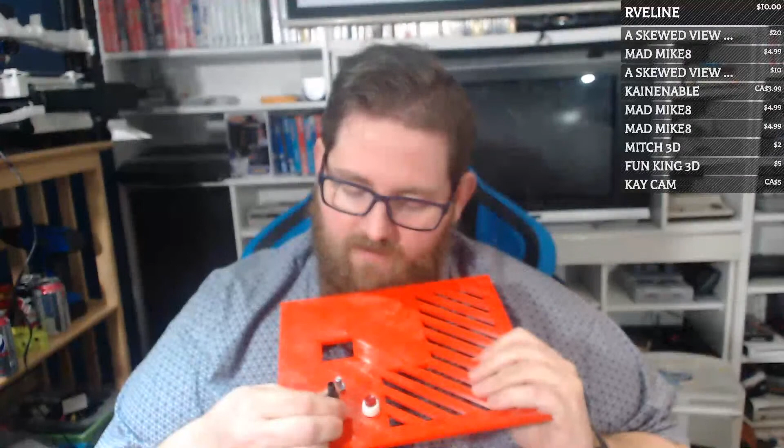Since then I've printed the door that we designed last week, and I verified that the pieces fit. They needed a little bit of filing to get them to cooperate, but you can see I got my power button, my power jack, and the volume knob was just fine.

That's the piece we test printed last week. So there's the test print. That was just sort of a cutout of the piece.

And I made a couple small adjustments since then, and so you can see the back. The fan shroud part here did turn out a little sloppy. It'll be fine because it's on the inside, but I think probably could use some supports underneath there.

So that'll take a 40mm fan. I ordered a bunch of fans though, and unfortunately I've got 1 or 2 40mm, but the rest are 30mm. So I'll probably release a version of this that takes a 30mm.

And this is designed to fit the Raspberry Pi, which I've got my dead version somewhere. I've got a Raspberry Pi that died on me, unfortunately. I've actually got 2 of them that died at this point. I don't know where I stuck it now.

I was thinking, oh, I'm not going to use that at all today. And there it is. So, yeah.

Pi mounts up like that. Should direct the fan right over top of the processor, which is there.

And there's a slot in the back, so you've got the micro SD card accessible even when it's together. So if you want to do a software update or whatever, no big deal. And there's enough room in this panel that we could add Ethernet and USB to the bottom.

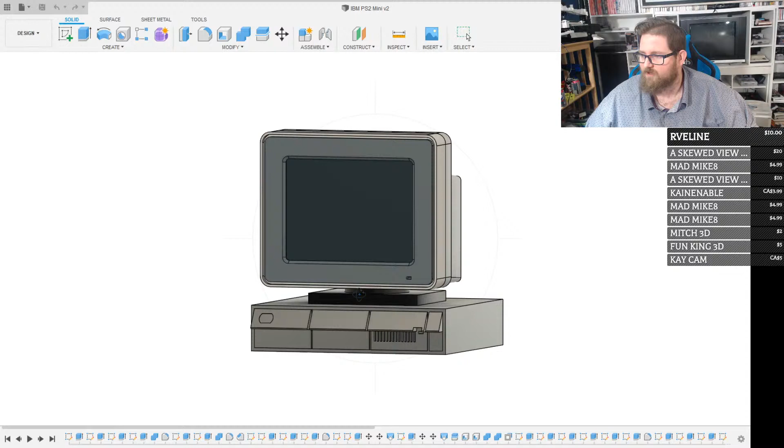So I've been working on this guy, which is a recreation of a 286 IBM PS2. The monitor's a little bit different because I didn't want to waste a ton of plastic.

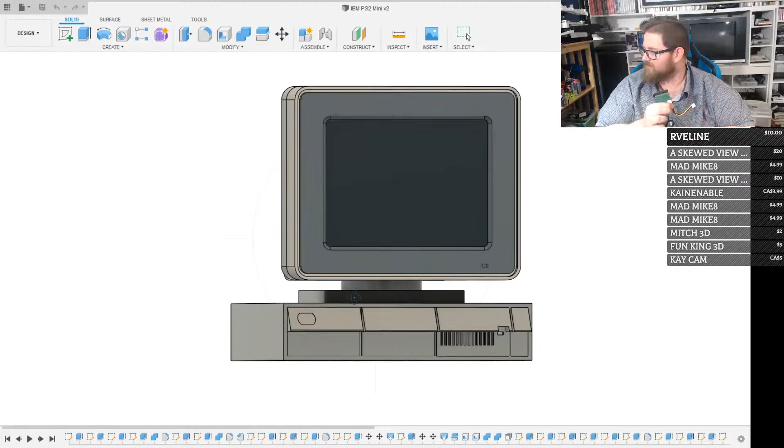So before I go into all the effort, because I am going to model in a functioning floppy drive bay into the front of this, right where it normally would be. Also, I'm going to try and model in a power switch the same way the original power switch is, and there's going to be an activity light for the hard drive, which actually just reads off the activity light on the Pi. So give me 2 seconds, I'm just going to go grab a floppy drive.

I'm hoping by next week, I'm going to spend next Wednesday getting things better organized here. So I've got an original, I don't know, this is a no-name brand floppy drive. But it's got pin 1 marked, so we should be able to just hopefully jam that in there. Put that together like that.

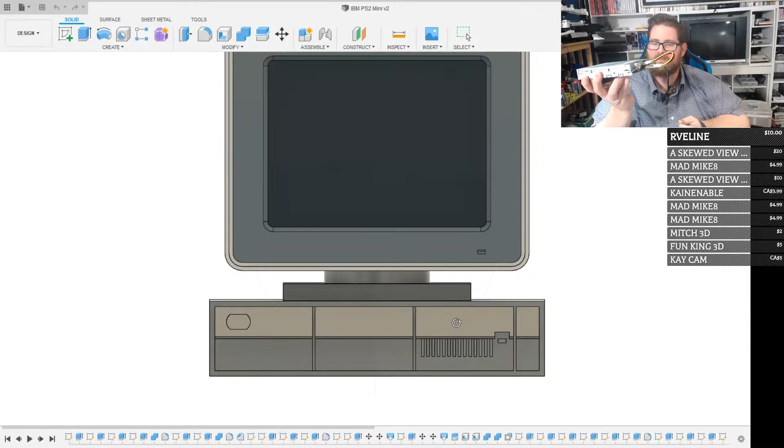Theoretically, that should be now accessible like any USB storage device.

It's a 3.5. I couldn't find... not that... So the original design of this only takes a 3.5 anyways. I have been looking for a way to adapt a 5.25 just because I have a few machines that run on 5.25s that I have floppies for, but I don't have boot disks for. So I was looking for something that would allow me to write 5 1/4 through USB, and so far all the USB devices I found are read-only. So unfortunately...

Okay, so what are we gonna test this on? I need something, I guess this is gonna be a little more complicated than I thought, because I need something I can actually interface with.

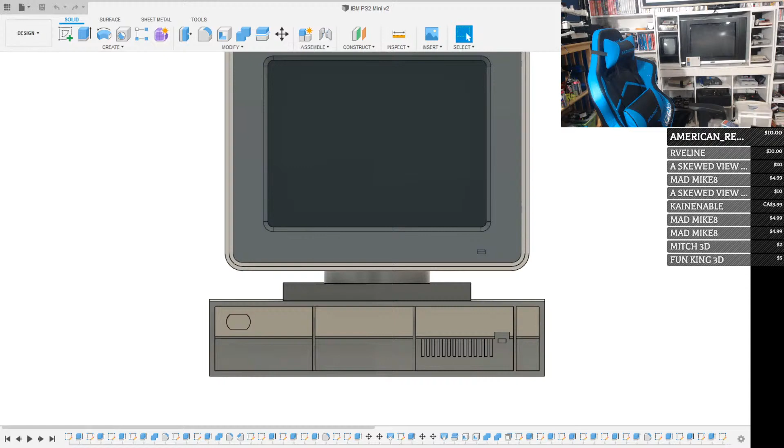Okay, let's see. For those who don't know, who don't follow him on... oh, first of all, thank you so much, I appreciate it. Those who know, Steve is the... do you go by Steve or Steven? I'm sure we've had this discussion before, but...

Steven was the first person to build a replica of my full-size arcade cabinet. And his, I would say, arguably turned out better than the original one.

It's a really long USB extension cable, but it's of questionable quality. But hey, let's see if I can get floppy access, or if the live stream suddenly dies because I just blew up my streaming computer. You know, have a good one.

Nothing happened. Oh, I mean it, yours certainly turned out more polished. You got the colors right. I didn't even hear a chime to say it detected something.

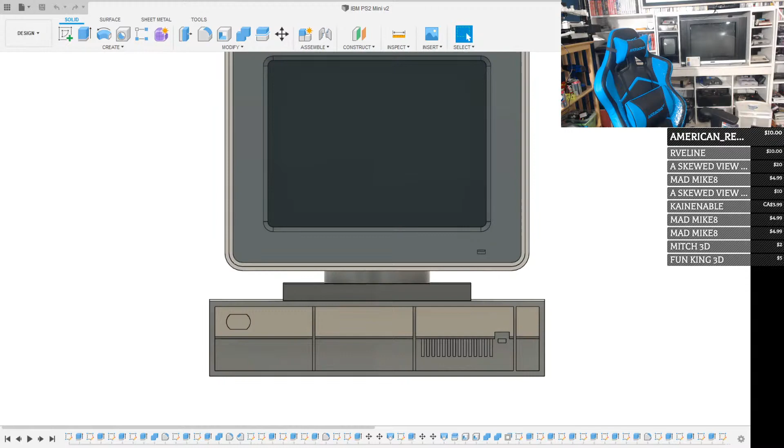Got a few floppies here. Yes, but who cares? What do we got here? How about an MS-DOS 6.22 floppy? Let's see if it'll read. I think if it doesn't read, it's probably the drive and not the disk. Oh, nope, fired right up.

Hello, Mr. Buttram. I will put USB on the back, most likely. Well, it read the disk.

So I guess the other question is, is it going to work on... now, I'm assuming if it works on Windows, it'll probably also work on Linux/Armbian/whatever. I have an Orange Pi running over there that I could try mounting it on and see what happens.

Bear with me for one more second while I go plug this into my other setup, and then we'll fire up a putty session. Okay.

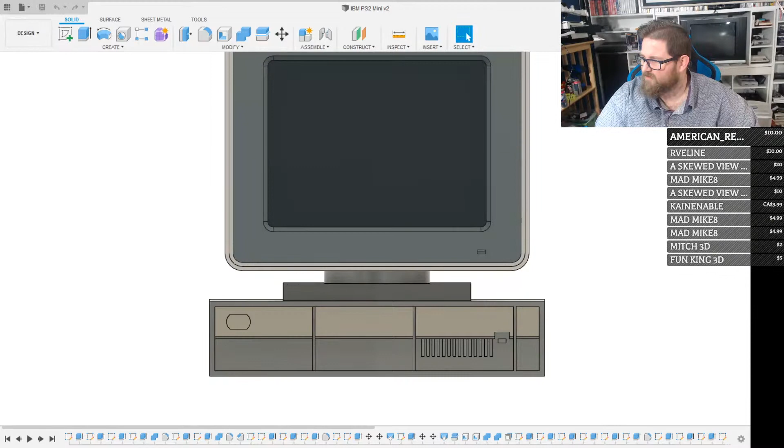Make sure the floppy kernel module is loaded. If this is not the case, edit the modules file and add the line for floppy. Okay. Create a folder to mount the floppy to. chgrp floppy slash media slash floppy. chmod 750 slash media slash floppy. Mount with read write.

Let's see. AutoFS. Let's do an apt-get AutoFS. Oh, apt.

Oh, I just realized it's not displaying putty. Sorry, guys. Putty. That must have been boring as hell.

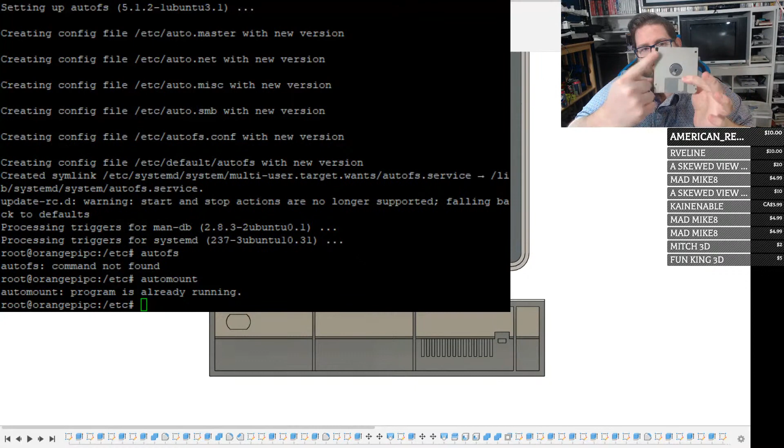Ha! That disk was read-only. Might have been fighting with this for nothing. So, for those who don't know, in case this is before anybody's time, there's a switch on old school floppies that allows you to make it read-only so you don't accidentally overwrite your crucial data. And being that that's an MS-DOS disk,

it automatically did that. So let's go ahead and try mount slash dev. Actually, if I go back through my commands, it should still be here. Was it DF? Doesn't show my floppy in here, unfortunately.

Okay, well, now we're getting somewhere. So the drive is HD, and so is the disk, but I've got HD, high density, and double density disks. umount slash media slash floppy.

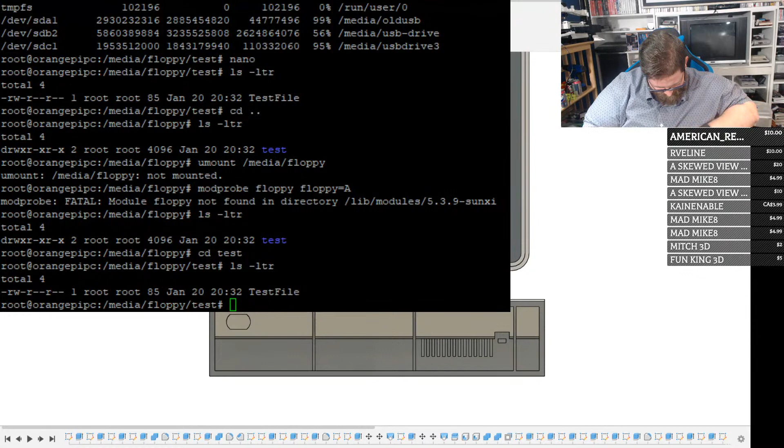She's really hugging on there. Like, so I ordered this, and it actually came with the wires hot glued into place as strain relief. So, I can see one of the soldering points doesn't look fantastic. I don't know if it'll show up on camera, but one of the soldering points almost looks like a cold solder point. Regardless, it worked.

Yes, that's part of the reason I'm doing it, so we get the sound effects. Okay, so I need my calipers, which I thought were right here. They're there. Okay, so we need to take some measurements off this guy. I'm going to go ahead and close the PuTTY session for now. Gets us back to Fusion.

I think if you're talking about on YouTube, I think LGR already did that.

So this thing's 100.7 millimeters across. Just gonna open up a notepad window. So floppy drive: 100.7 millimeters wide, and 24.5 millimeters tall. We'll have to add some tolerance around that.

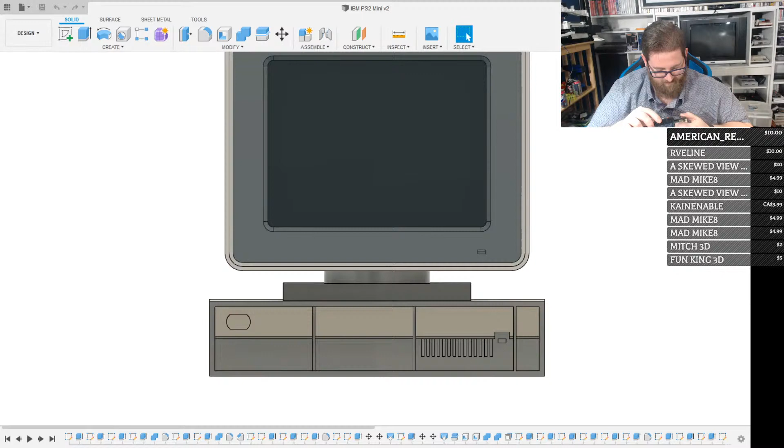So the real thing is going to be trying to figure out where the screw holes are. I guess you guys can't really see what I'm doing. I do have another camera I'm going to set up that points towards me, that'll give a better view of stuff. I just have not had a chance.

So it looks like the top of that screw is 5.7, and that's a 3 millimeter, so we'll probably give it a little extra space for it. And then from the front of the drive, we're looking at 26.3.

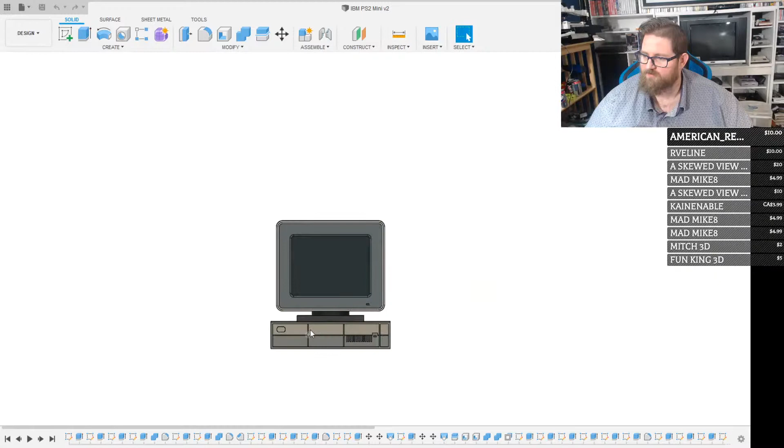Okay, so we got some basic measurements. So what we can do is we can jump into Fusion 360. Oh, and the actual floppy drive entrance, 90.7.

Wait, is it 90.7 or did I mess this up? Hold on. No, 90.7. And then 6.5 millimeters down... 4.3 tall. Wow. 4.3 tall and 6.3 down.

Okay, so I think the first thing I'm going to do is model the actual floppy drive, if I can. And the floppy drive in question is... 144 millimeters by, I think I got that recorded already.

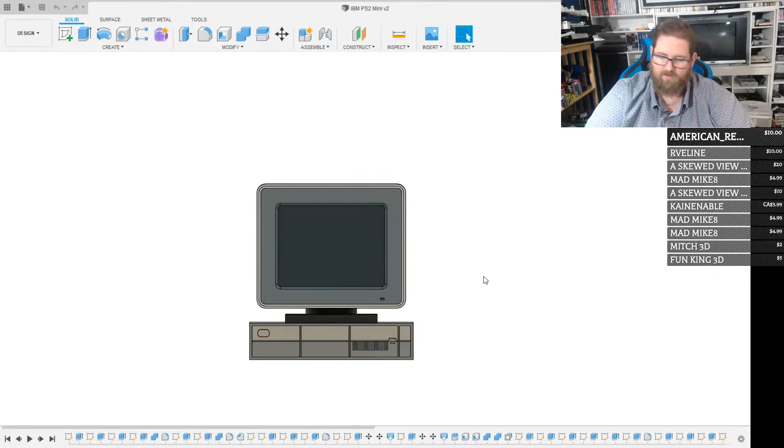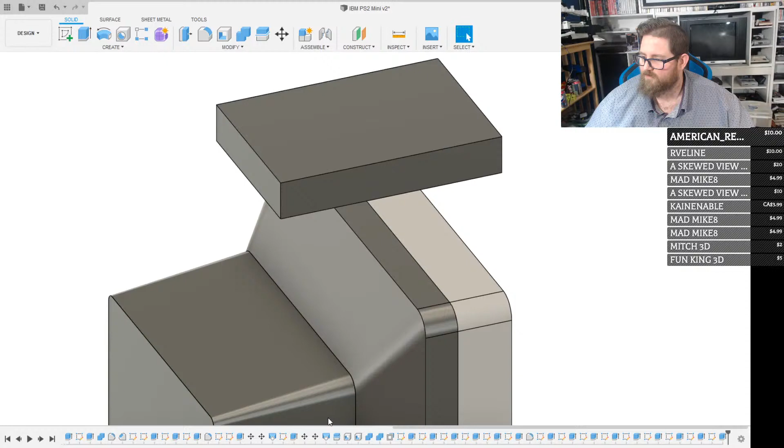Okay, so let's start off by just doing a rectangle here. We'll go ahead and create it on this face so it's the right way. We're looking at 100.7 by 24.5. Make it 144 millimeters long. Okay, so then go ahead and put the hole in the front of it.

So it's 6.3 down. I'm going to go ahead and start from the middle, so we'll do divide by 2. How tall was it? 6.3 down, 4.3 tall. So let's do 6.3 plus 4.3, divided by 2. And from there, we can create a rectangle that accounts for the hole our floppy goes into.

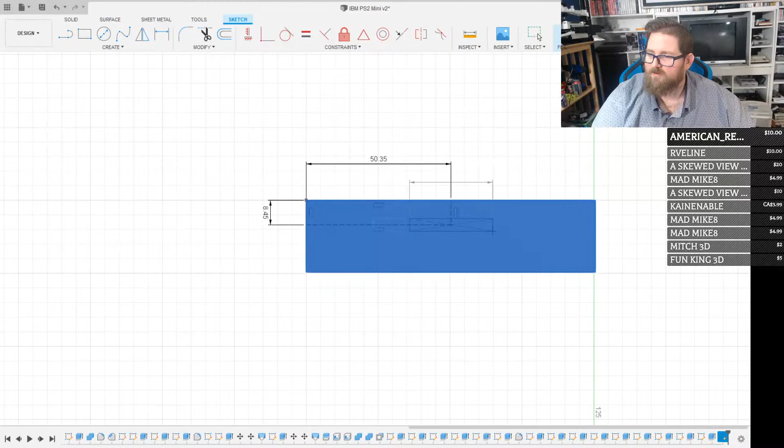So I'm going to start off with a center point one, and it is 4.3 tall and 90.7 wide. And let's just make it minus, I don't know, 90. So far, so good.

Then we need to add a button. Top of the button is 8 millimeters, so let's go ahead and add a line across the bottom here that is 8 millimeters tall. Then from the inside, we're looking at 14.8.

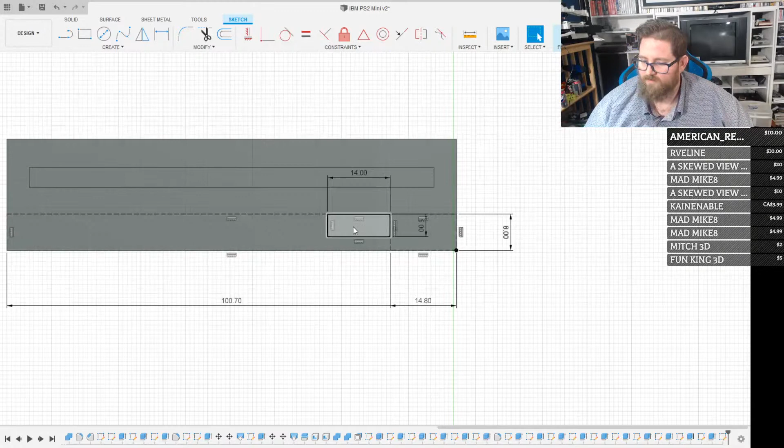And then, what were we? The button is 14 by 5, 5 and 14. And when extended, call it 6.5. 6.5. That looks about right so far.

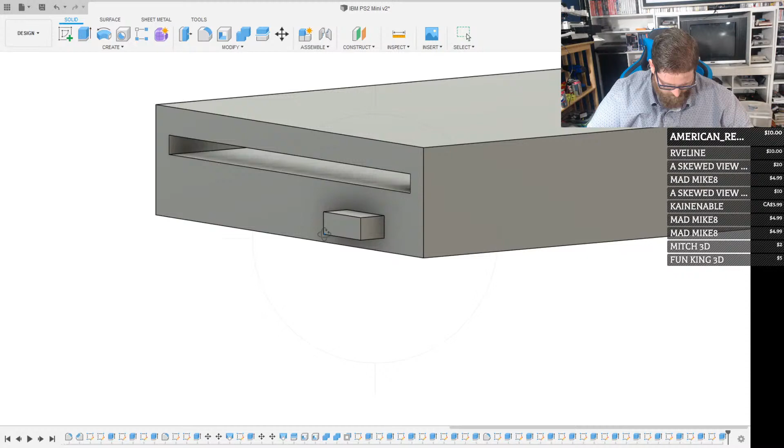Next, we're going to add in the optical, the light, that is. Okay, so the light is 4.4 from the bottom. Confirm I got that right. Close enough. It's 20.4 from the side.

And then the light is 5 by 2.5. Sorry, I gotta make sure I get this right. Yeah, that's right.

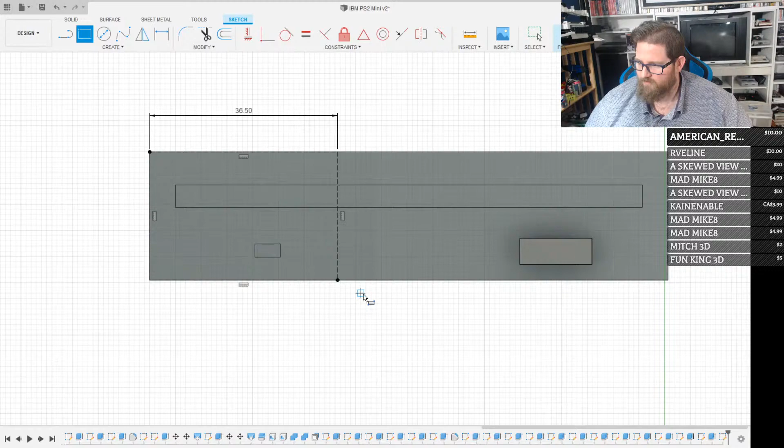We'll do 36.5 again this way. It's just quiet, that's okay. Okay, then cross this way.

That's completely fair. I just wanted to make sure I wasn't missing anything. And 3.

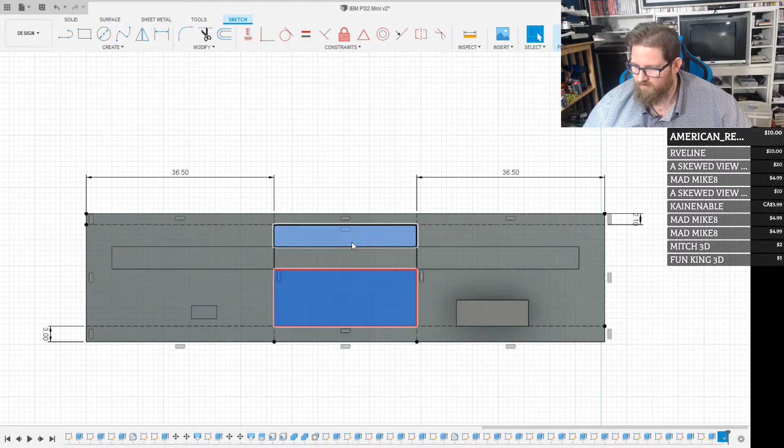Can I add—if I leave that like that, I don't know if I can add a chamfer without... no. Let's go ahead and minus 0.5. And then we'll bring that sketch back so I can do a minus 0.5. And then we'll add a chamfer.

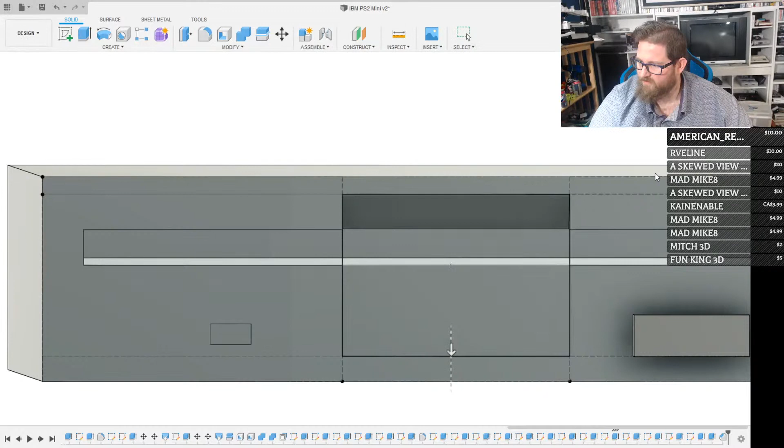Distances, and we're gonna go 4 and 8, 9, 12, no, 10, 11, 10.5, 10.8, 10.9.

What do you think? Does that look like a floppy drive?

I do collect PC parts. That's the other thing I collect, which I don't have enough space for, either for 3D printing or that, but I do it anyways.

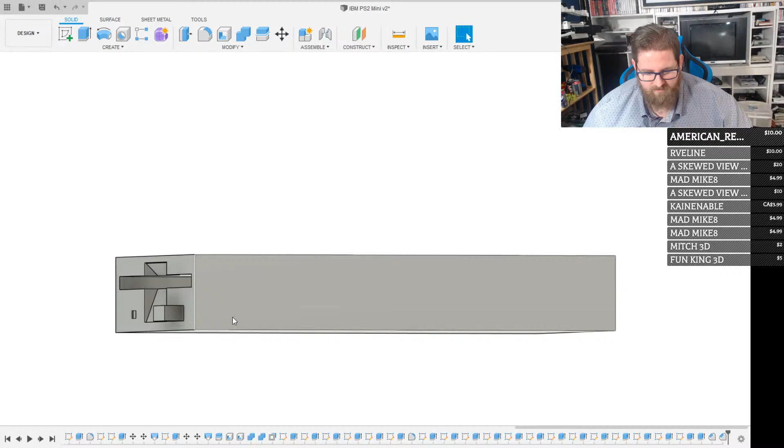Okay, so now we need to add the screw holes. Top of screw is 5.7. So we'll do a...

Oh, really? That'd be cool. Is it a surprise, or do I get to ask what you're bringing?

Top screw is 5.7, back of screw is 26.3.

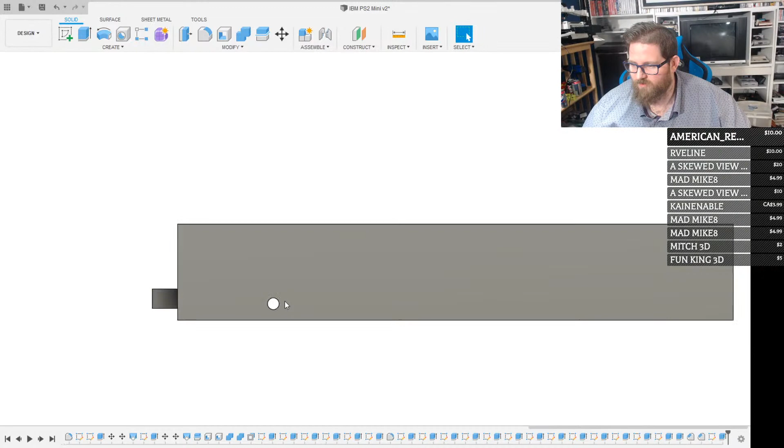There's one screw hole. Where's the next one? I might as well add the rest in, right?

Next one's at 86.1. Wait, what was it? Next one is at 86, it looks like.

Shenanigans here. Well, I love you too, Sean. I hope I get to see you at MRRF.

So doing it this way, it puts the hole all the way through to the other side, so I don't have to try and figure out the rest.

Looks like the next one's at 116.

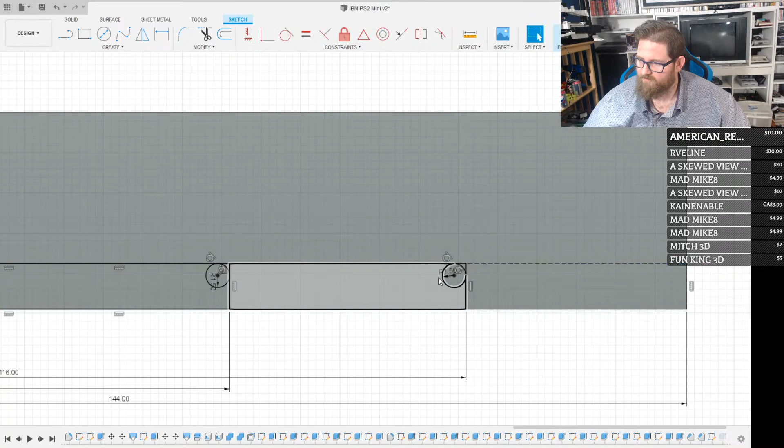And let's do 116. Circle. This guy and this guy. 1.5. And minus 200 again. Get rid of that sketch.

And there, for better or for worse, is our floppy drive. Can make it a little more detailed if we want.

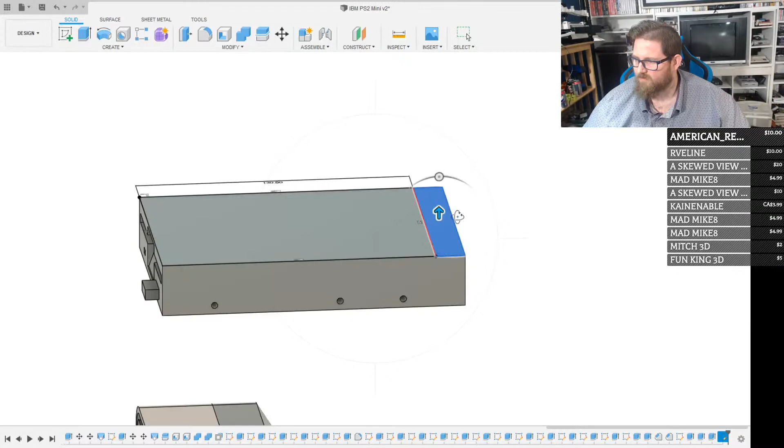We can go, let's see, 130. Oh, that's not too bad for a little bit of work, guys?

Okay, so now that we have our floppy drive, I'm going to rename it floppy here.

3D Print Viking is here. How's it going?

Okay, so we need to move this down here. I haven't quite figured out how it's going to go in yet, but we're going to figure it out.

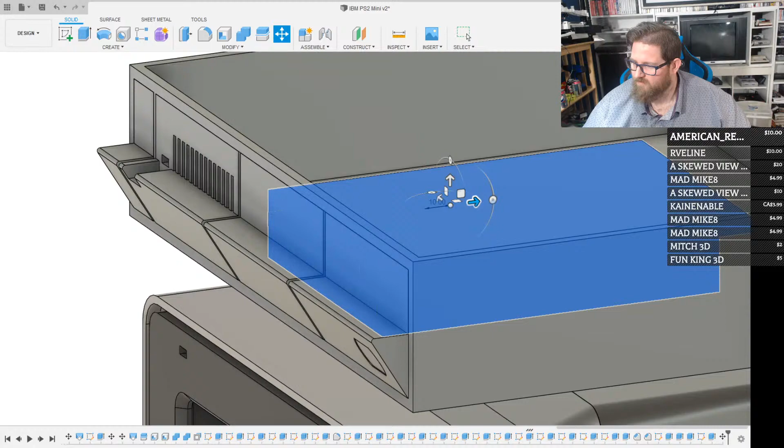Probably come this way a little bit more. Call it 3. Needs to come back a little. So it's got to have enough room to get the floppy out.

I guess I could line it up so that the actual button sticks out enough to eject, but probably not going to be easy to do.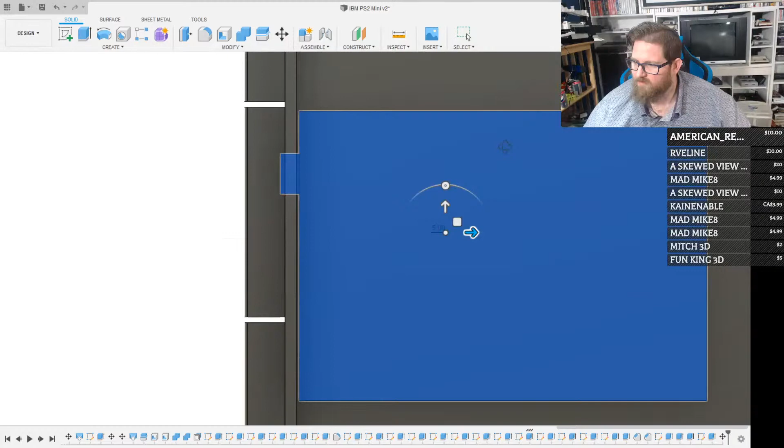Okay, well let's start there. And I'm going to hide this main body. What I'm going to hopefully do is just...

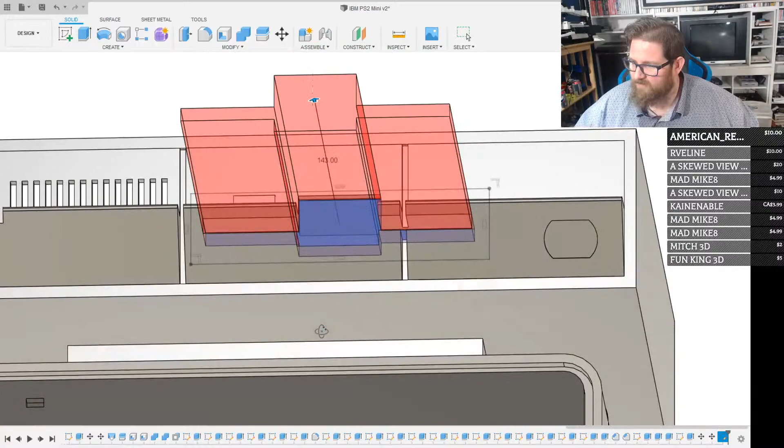So that more or less shows me where it's going to show up. I'm not going to do that yet, though, because I think I need to bond this back together beforehand. There we go.

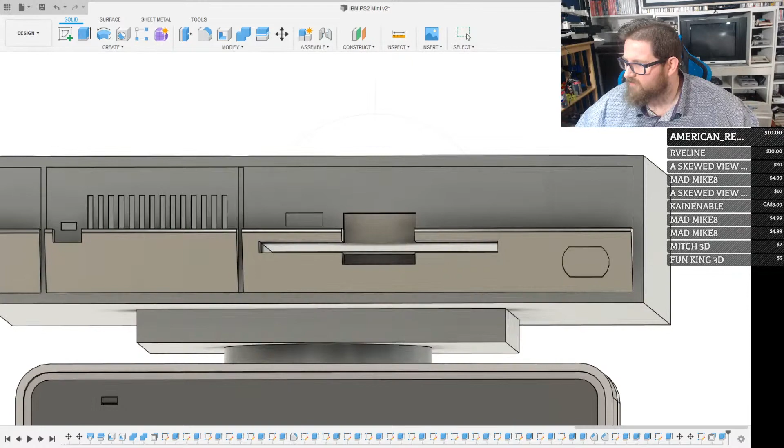Okay, so it's not... I mean, it'll never be perfect because it's not going to be life-sized, but that doesn't look too bad. Let me see if I can get my reference picture back up of this IBM PS2.

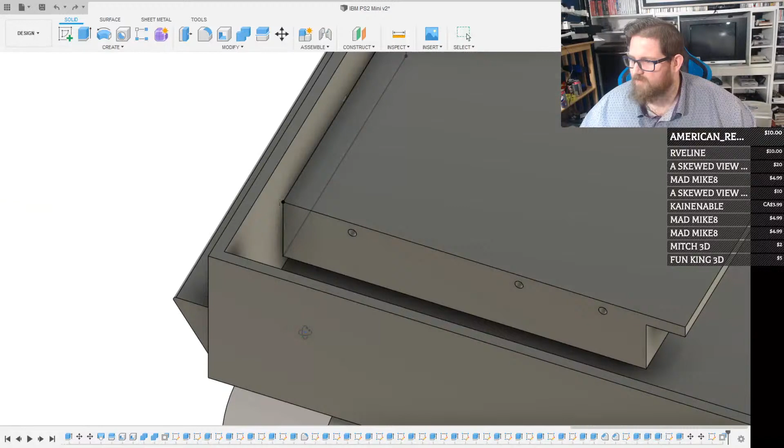I think I might want it a little bit higher. Oh, but if I put it up higher, then the button's not going to be accessible. I think that's probably form and function together. What do you guys think?

And then we'll, let me see. If I go from here to here, 6.3, so then if I go from here to here, I do 6.3. And I forget how big this space is. Let's just call it 2. I think 2 will be close enough.

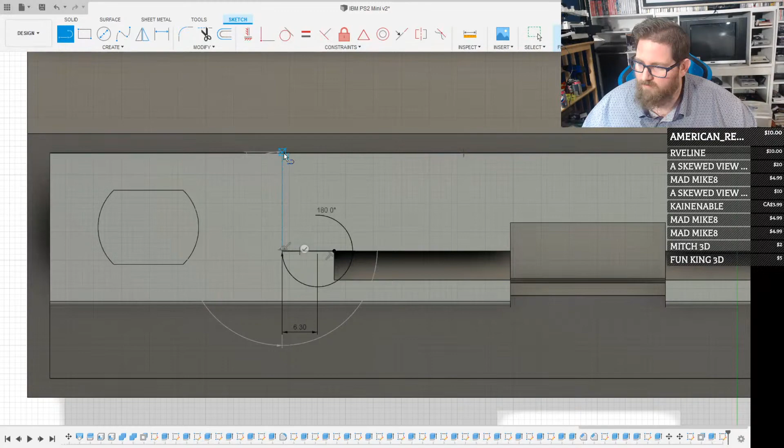Well, it's drawn on the angle though, isn't it? That's okay. There's another way to make this happen.

Let's do finish sketch. Chris Riley is here.

From his basement to your YouTube account? I don't know. How you doing, buddy? I miss chatting with you, Chris. I don't remember the last time we had a talk. I'm afraid basically every message I send you is, hey, look, this is what I'm working on, which it's got to be annoying for you.

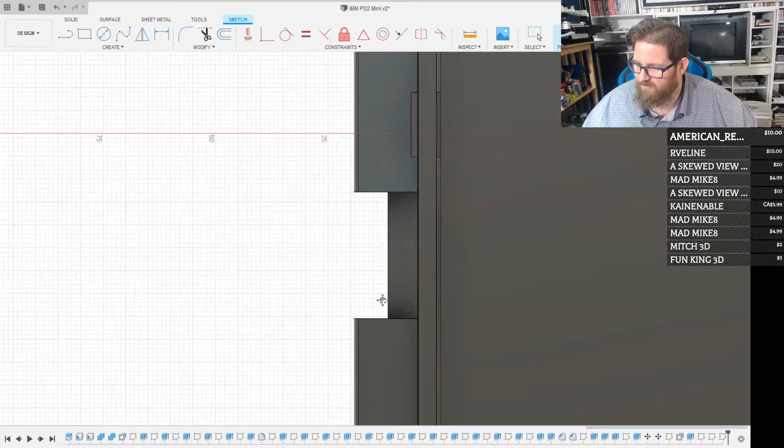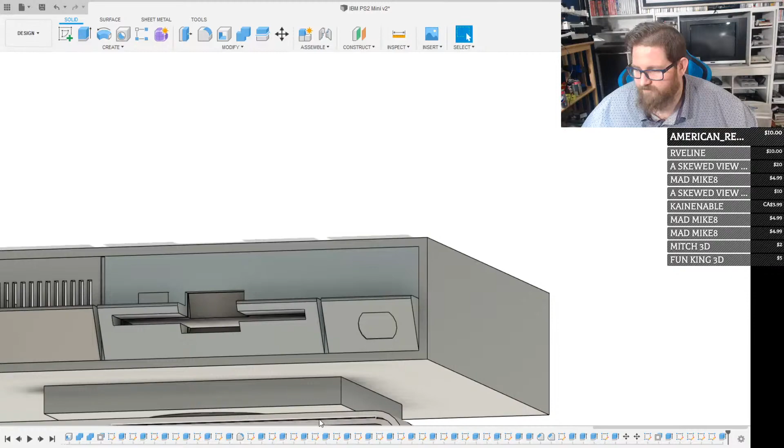How inset is that? Let's do an inspection. 1.9. Okay, we can fix that.

Oh. Must have grabbed an old sketch by accident. So which sketch is still visible? All of these guys.

Okay, well that turned out pretty decent, I think. Let's go ahead and hide the floppy.

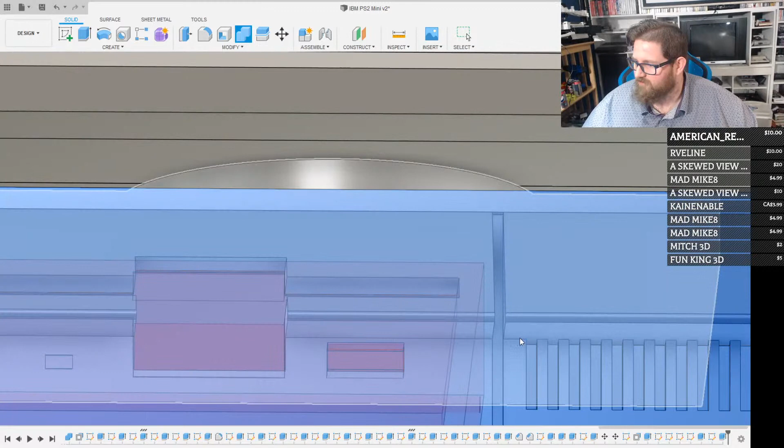So we're going to do combine, but then I'm going to change this to cut. I'm going to say I want to cut this body with my floppy drive, but I also want to keep the tool. So this basically says remove everything where this is intersected by this, using the floppy drive as the cutting tool, and it's going to punch a hole where this button is. By saying keep tool, it doesn't delete the floppy model. So now if I hide the floppy drive, there's a hole where that button is.

So then I'm going to make this hole bigger. I want to add tolerances to it. Let's go for a full 1 millimeter tolerance, just like that, and remove, I don't know, 10 should do it. So then if we put the floppy drive back, you can see the button's now centered. There's a nice hole for it to go through. And if I have to print a little cap or whatever to go over top of it, then it's not a big deal.

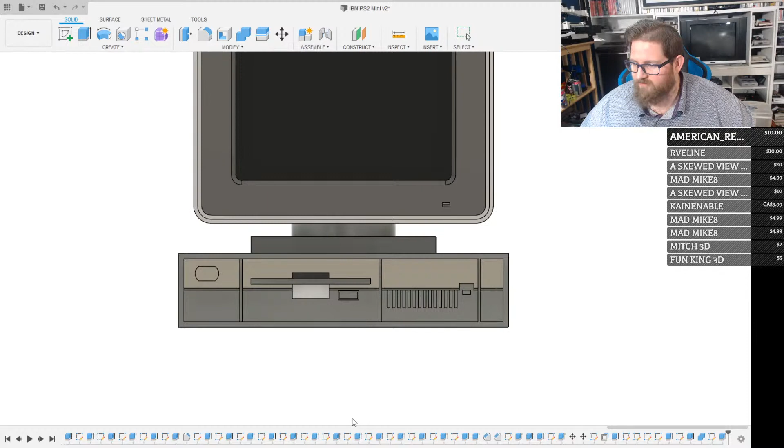Do you guys think that keeps enough of the original design that people will get what it is, but also allows us to have a functioning floppy drive in a miniature? I guess the other thing is I have to make sure there's still enough room for the Raspberry Pi in here.

Where's the Raspberry Pi gonna go? $1 million question. So it's 54 wide, let's call it 55 by 85. So I need to have enough room for 55 by 85.

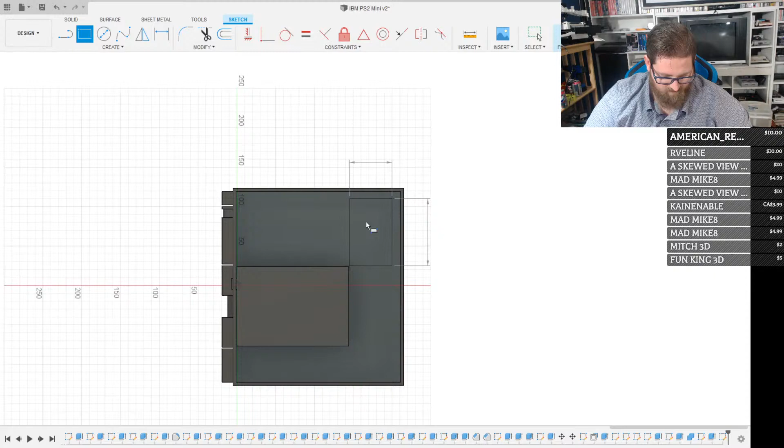Okay, I'm thinking here. I also have to make sure that off the back of here there's enough room for the wiring for this guy, so we need at least another 58 behind it. Okay, so you have 66 behind, that should be fine. What about for thickness?

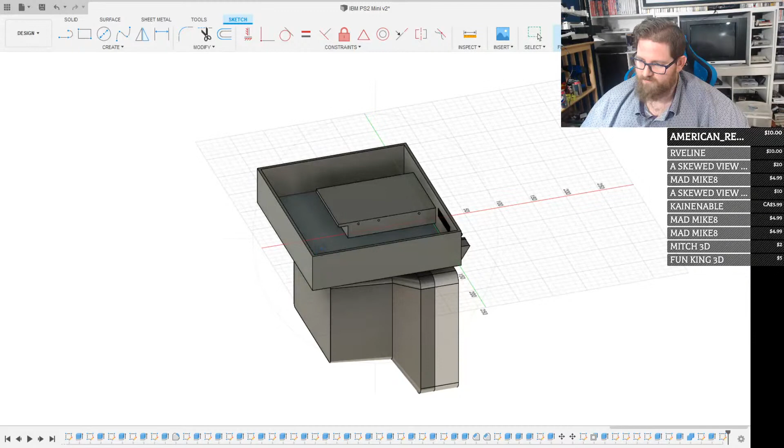Not really enough room for me to put the Pi off the back. There's no super easy way for me to do this. I'm just looking at the Pi here. So ideally I want the HDMI, the audio, and probably not the power -- I'm probably going to power it through the GPIO, but I need these two exposed. So I guess if I mount it from the top... oh, and the thing is I also need the USB internal, so that complicates things. Does it though? No, it doesn't have to, because I'm going to mount the Pi to the bottom of this guy, I think.

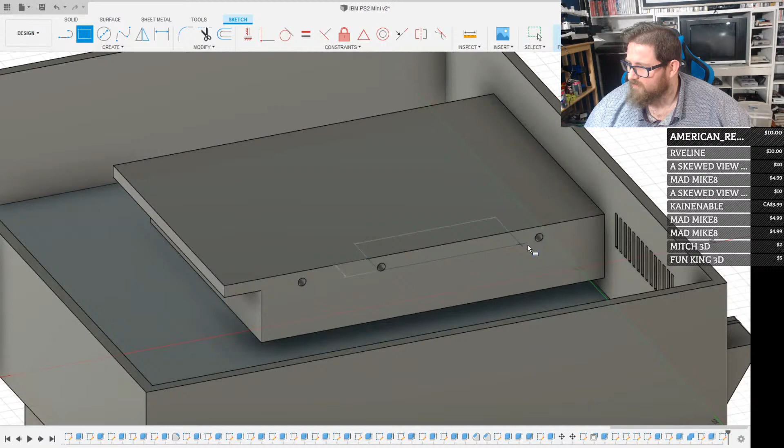Then I just have to make sure that I leave enough room for the micro SD card. Okay, so other things I want to do -- the screen is not permanently mounted on top. No, the screen's going to be its own separate thing. So finish sketch. I'm going to hide the top of this for now.

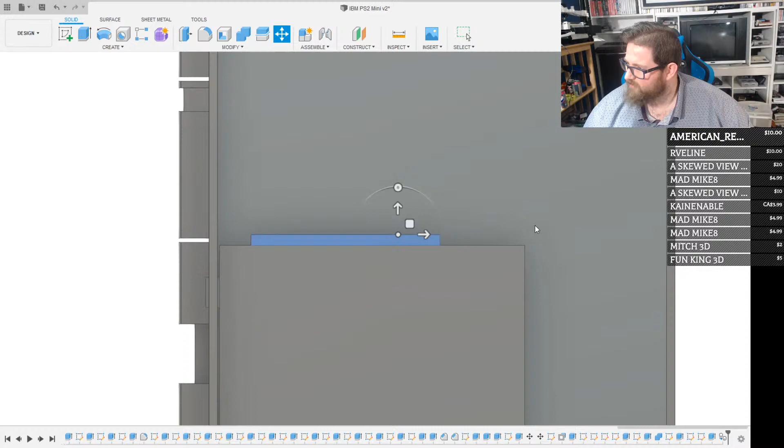Let's make it 5 millimeters, and we'll do a new body like that. Then hopefully I can just do a move bodies and select this guy. We're gonna make a copy of him, so I'll click create copy over here, then we can drag it down, like so. And then to make sure everything lines up, I'm going to do the final movement as point to point. I'm going to select that circle there, and that circle there, and that should be that. And then hopefully, yeah, none of those are poking through.

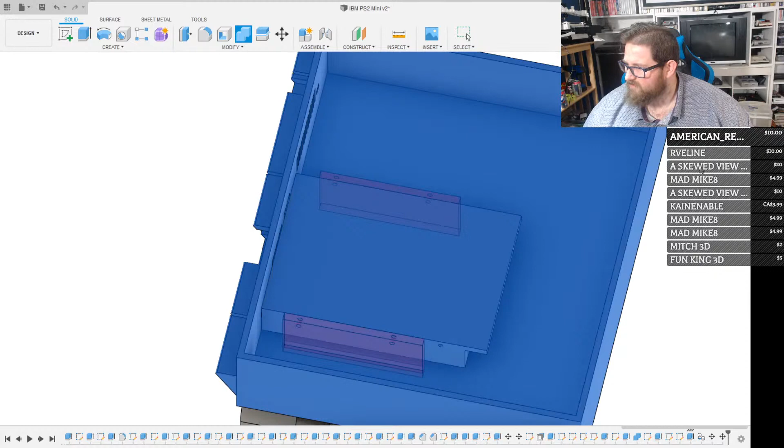So now we want to integrate these into the main case, so we'll do a modify, combine. We'll select this, this, and this. Change this back to join because it was still on cut from before. And bam. So we now have mounting spots for our floppy drive, which unfortunately is going to be super tricky to get to. That's not going to be fun.

So my first test print will probably be to cut just the floppy section out of this and see if everything fits together. I've been tracking down filament for this build, so I'm going to order some on Wednesday. It's more expensive stuff, but I think it's worth it to do a good job on it.

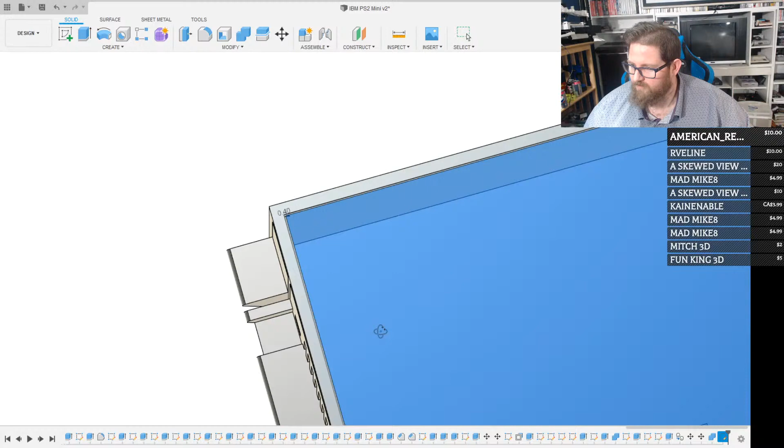Okay, so now for the bottom of this guy. I want it offset by, let's say, 0.4. We'll go ahead and make the bottom, I don't know, 4 millimeters is probably good -- 4 millimeters thick, like that. Did it just blend it into one piece? Did I go the wrong way with the offset, maybe?

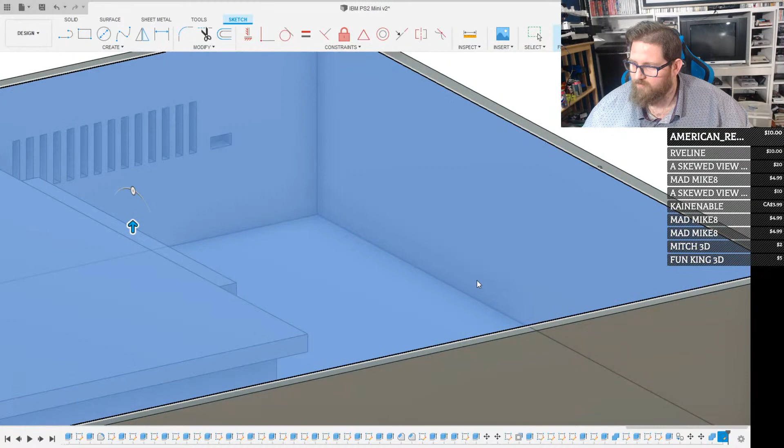Point 4. If anybody sees what I'm doing wrong, just point it out. Finish. Maybe I started in the wrong spot. Point 4. There we go. There, that's what I was expecting.

Next we'll do... oh, why did it separate those again? Oh, I know why, hold on. I forgot to check off Keep Tool, so it actually recreated copies of those guys.

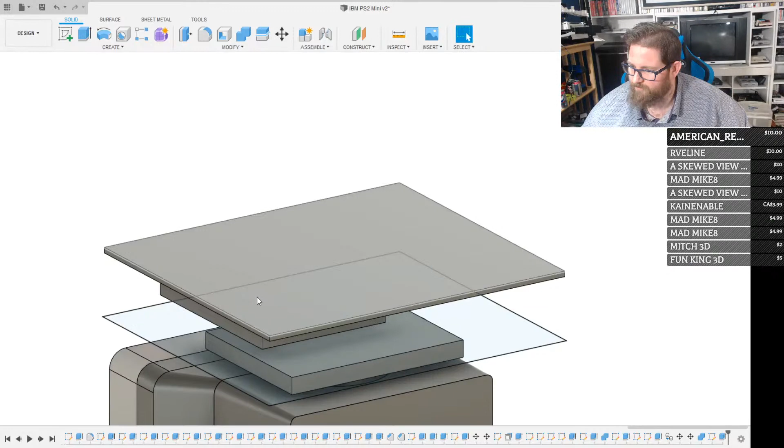Okay, so then we're going to start working on the bottom here. Let's hide everything and get rid of whatever sketch is still showing.

That's not too shabby. Let's do, come on. Let's add some screw holes to this guy.

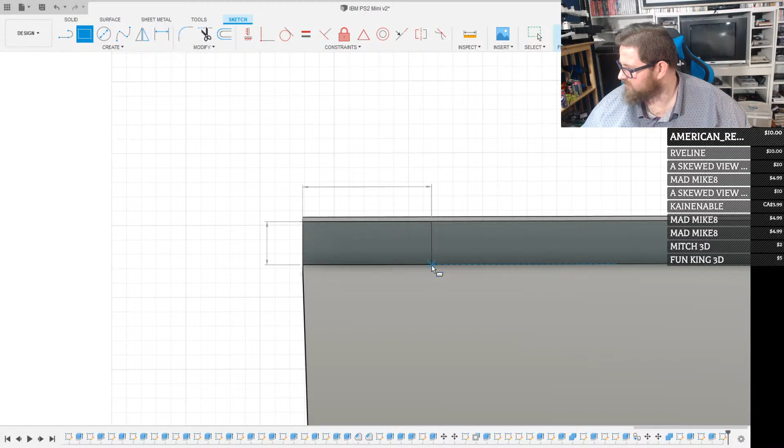$45. Not bad. I mean, it's terrible, but it's not bad.

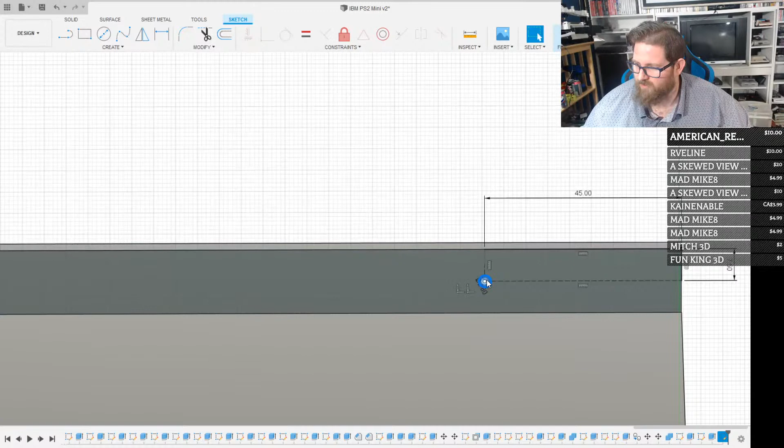I was gonna try and get a sponsor for this project for the filament, but I still feel really weird reaching out to people for stuff, so I didn't. Which is weird, because everybody I've reached out to so far, and the people that have reached out to me, have all been so freaking awesome.

Now, if I remember correctly, these guys were indented on the original one, and like fairly indented, so let's do 7.5.

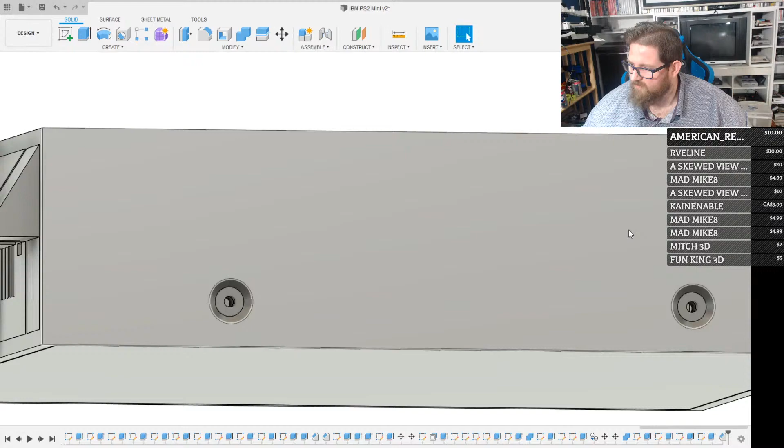Do -2. Then I think they were chamfered. That feels more or less right to me.

Anybody here bringing a project to MRRF?

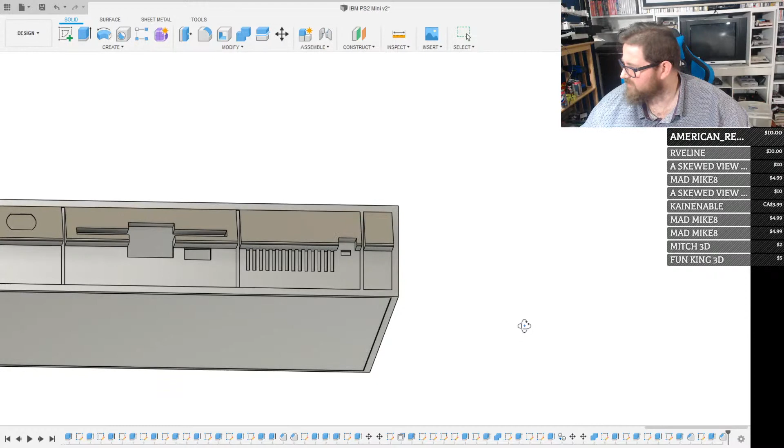The only thing I haven't worked in is a power switch because I haven't quite figured that one out yet.

I'm gonna start wrapping things up here in about 10 minutes. Got an early morning tomorrow. Pretty satisfied with the progress we made tonight, though. I think we're off to a good start.

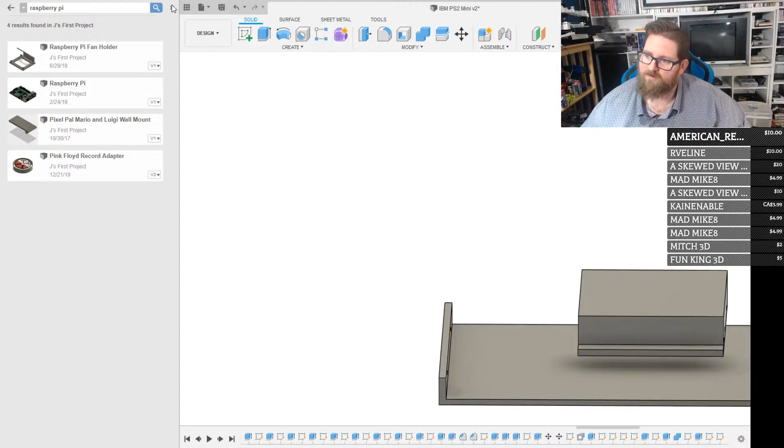Better late than never. I think the electronics in this are gonna be a little on the tight side.

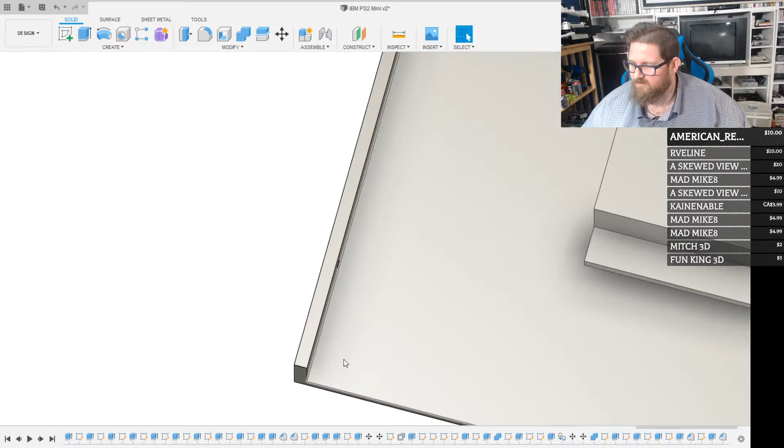Okay, so let's do 5-5. Add a 3mm circle there. We'll do finish sketch, and then I'm hoping, actually what we're gonna do is then...

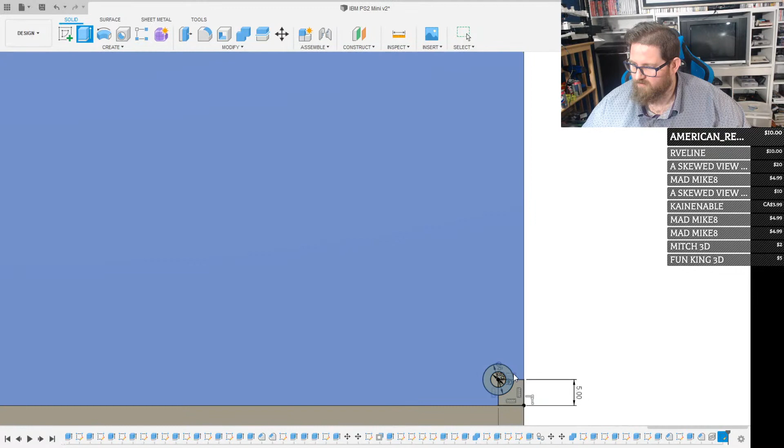Six. 6 millimeters tall.

So what I'm hoping I can do now is then move this piece into position using that as the anchor point. So we're going to do a right click on the piece. We'll do, where are you, move.

Apparently I'm blind tonight. Point to point. Origin point, we're gonna pick this circle. Destination point, gonna pick the circle mount that I just created.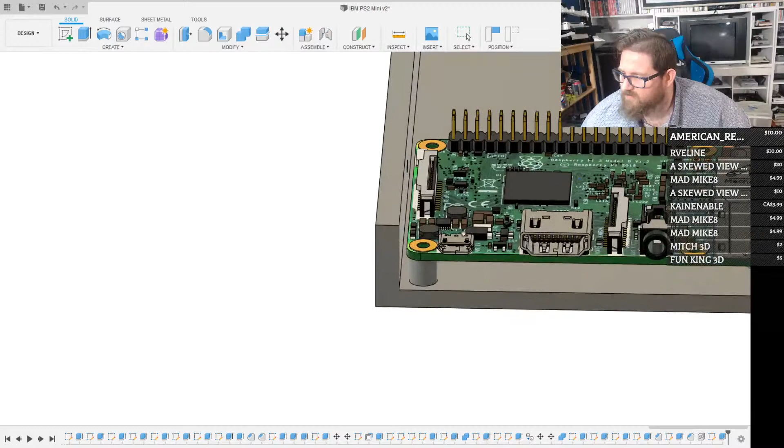Now, the biggest snag of all is going to be how tight it gets in terms of the floppy connector. Actually, it shouldn't be bad with this one because, yeah, the floppy connector is not there. It's on the other side, but for other people recreating this project afterwards, that might be a pain in the butt.

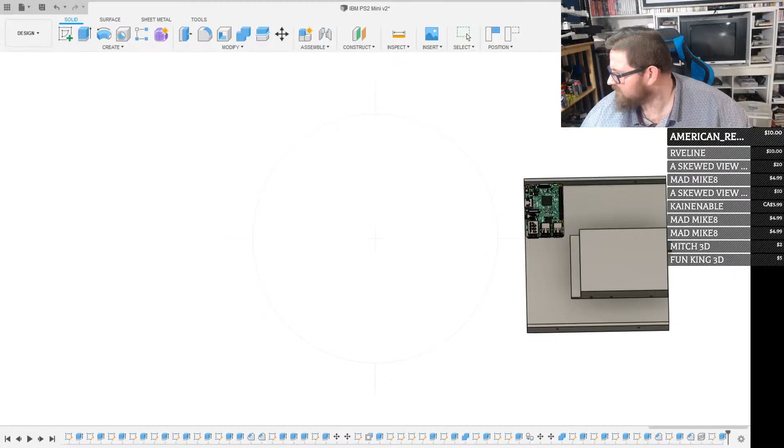I think that'll be fine, though. What do you guys think? Yeah, that'll happen.

Oh, that's not the way I want it to rotate at all. I want to see how close to the back we are here.

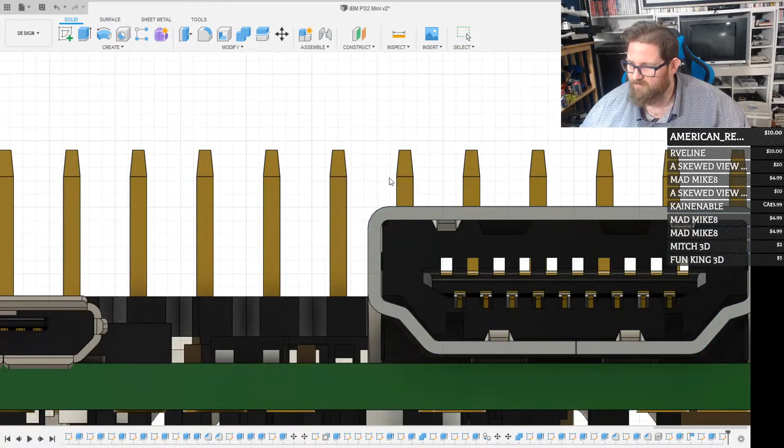Call it 8. Then, I wonder, can I do offset? Call it 2.

I think that should be big enough to take a regular HDMI cable. There's our audio.

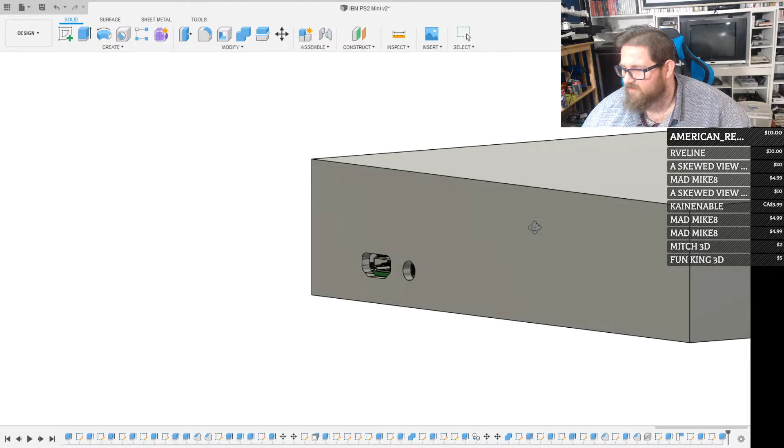I don't know about good work, but I'm hard-headed enough to just keep going until it works. I'm going to give it a save now before I screw it up.

Okay, we're just about to shut it down, but since Robbie Mac just came in, I might as well bring everything back to show it off. So I present, for the first time to Robbie Mac, the IBM PS2 Mini.

So it's inspired by an actual design. It's not going to be a one-to-one creation, because I wanted to be able to put an actual floppy drive in. And if the floppy drive isn't miniature, but the rest of it is, well, that's the way it goes.

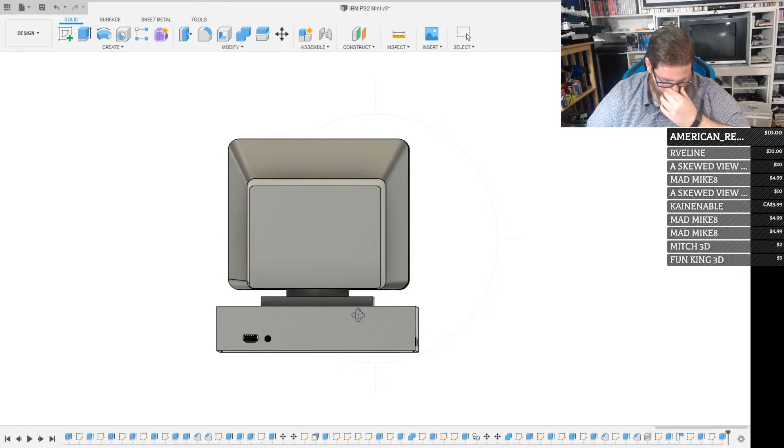I'm going to add some connectivity off the back. Actually, one of the things I need to order before we go is I want to get a USB to 15-pin joystick adapter, so that I can have an actual joystick, so you can connect old school joysticks to it.

Yeah, just about. USB to joystick adapter. USB to joystick adapter, 15-pin. It's a $25 investment.

The $25 investment, I don't even know for sure it's going to do what I want it to. I'm going to leave it up to you guys in chat. Should I or shouldn't I? Is it worth the effort?

Is it worth the effort so I can connect up all my old... I've got a few of these guys. So these guys use that old school 15-pin interface. These things were a big deal back in the day. This is actually the newer version.

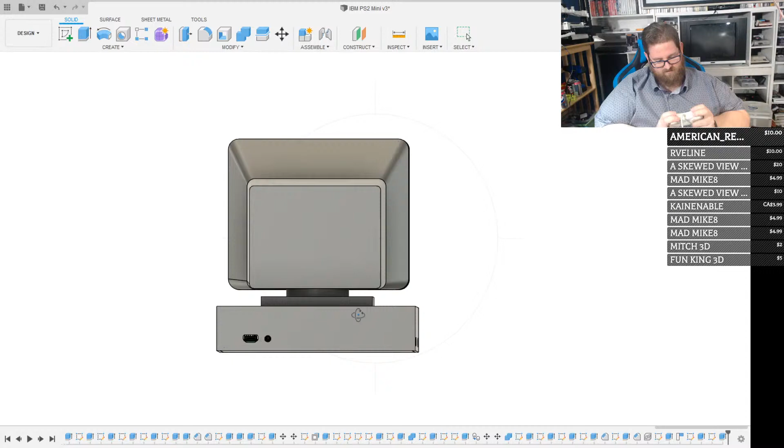I'm going to do a little bit of digging tonight and see if I can find a cheaper version of it, maybe on eBay or whatever. That's just me checking on AliExpress.

That is true. So here's the other thing. I'm waiting for it to come in, but I am also going to model the original mouse, which is this... let me see, I'll just toss up a link to the image on it. So I'm going to model up... that's too many characters, son of a gun. There we go, hold on.

I'm going to model up this mouse, except I'm going to model it around the guts from an Amazon basic $10 mouse. I'm going to rip the guts out of it, model the electronics up, and then build the mouse around it. It'll be a full-size mouse. I'm not going to be able to do the keyboard. I think the keyboard would be too much work, to be honest. I don't think I could get it to go right.

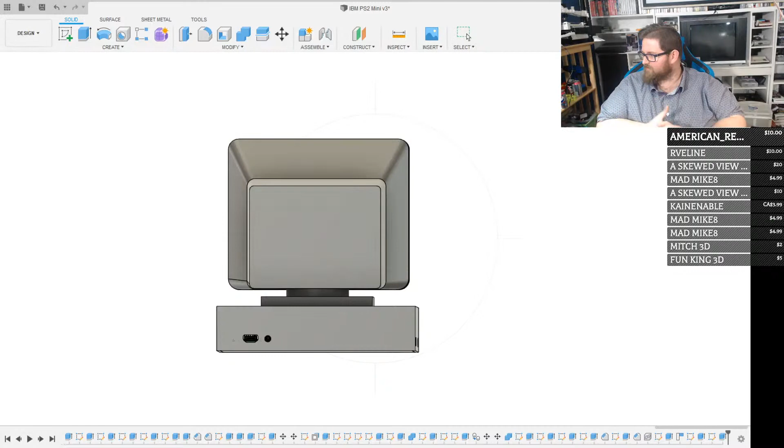I was going to try and track down an old IBM PS2 keyboard, the heavy ones, and they're too expensive. It's like a hundred and some bucks just for the keyboard, and this is a little project. It's going to be smaller, I think, than the Neo Geo cabinet, maybe about the same size. But that is the goal, to build a mouse that matches with it.

Well, I think that's where we'll leave it off tonight. I'm going to try and print a test piece for this floppy drive before next week so we can revisit it, or at least show it off next week. If that fits, then we're like three-quarters of the way there, because that's one of the most complicated things. I'm going to get a panel mount USB so I can add a couple of USB ports to the back. I'll need one to power the screen anyways, and then I don't know. I haven't figured it all out yet.

There's still some question marks. I haven't figured out what the power input on here is going to be, whether I want to make it so it takes a... do I have one handy? A standard 3-pin, like the power that a regular desktop gets. Haven't decided if that's the route we're going to go or not, but...

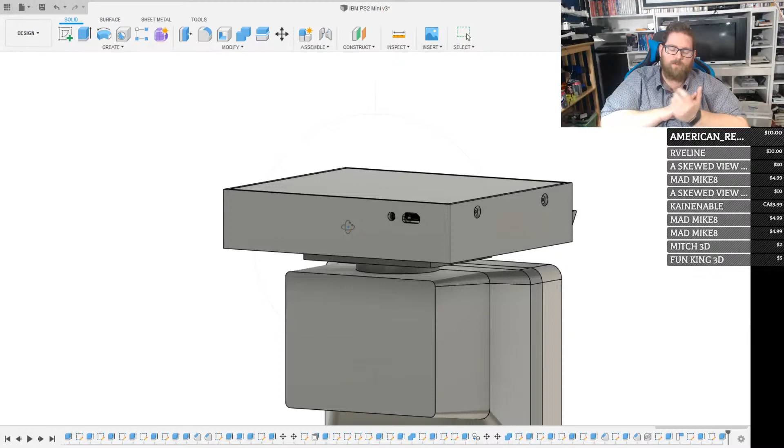It's not, like I keep referring to it as a MRRF project. This is stuff I've been working on anyways. MRRF, I'm not in a panic to specifically finish any projects this time around. I'm going to bring in what I've finished since ERRF. I do have a big project planned for ERRF this year. I've been talking a little bit with the organizers and stuff, where I let them know I have a really cool project that we're going to put out. Hopefully we're going to be able to get a space set up for it. I think it's going to be a lot of fun.